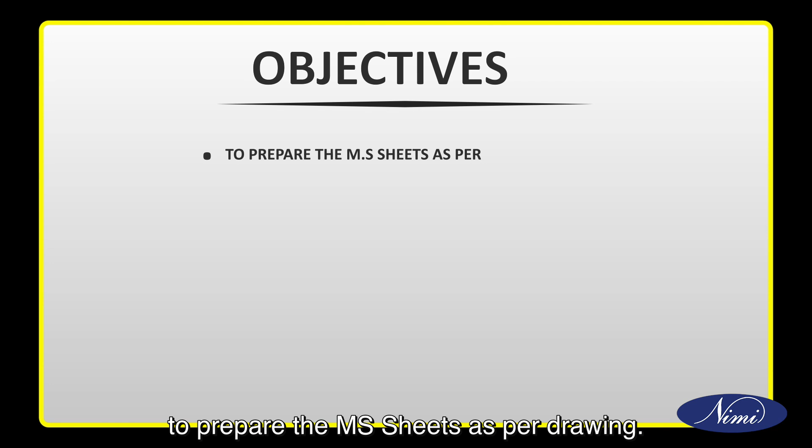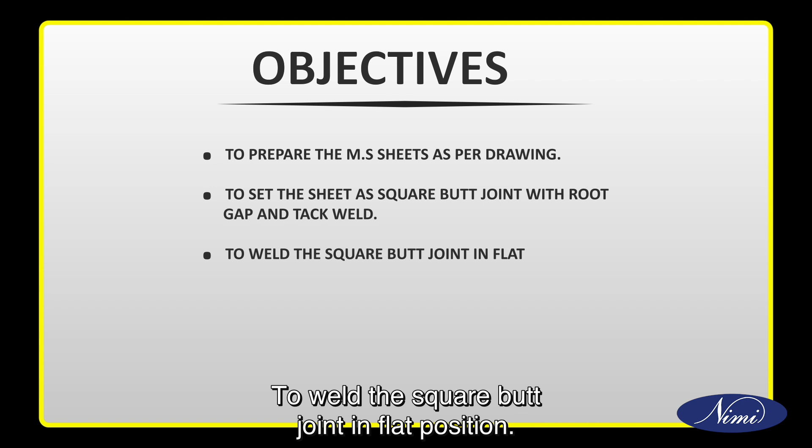Hello students. Today we have an exciting topic to cover as we dive into the art of welding and learn how to butt weld. Objectives of these videos are to prepare the MS sheet as per drawing, to set the sheet as a square butt joint with root gap and tack weld, to weld the square butt joint in flat position, to clean and inspect for surface defects. Let's start.

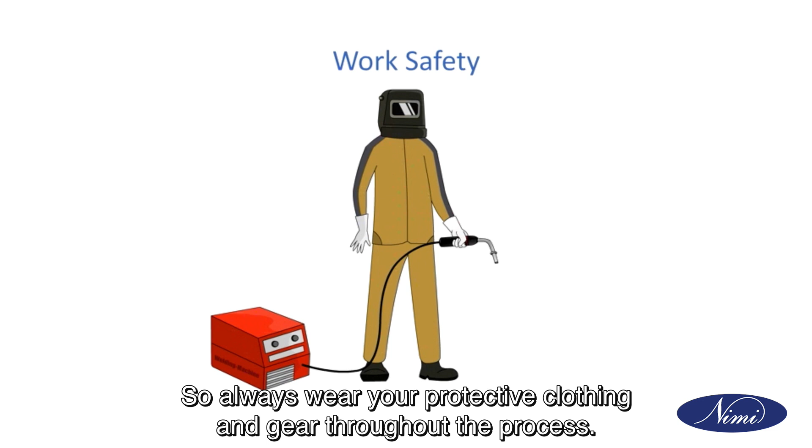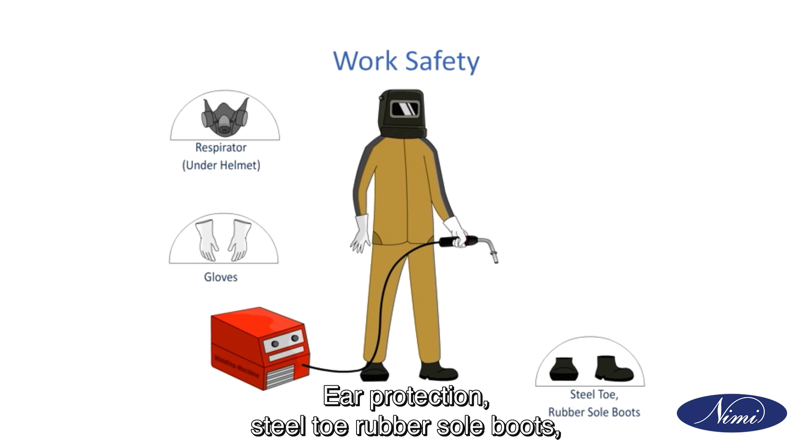Safety is our top priority. So always wear your protective clothing and gear throughout the process. Wear respirator, gloves, ear protection, steel toe rubber sole boots, fire resistant clothing,

helmet and hood. The first step in creating our butt joint is to cut the sheet according to the drawing. The dimensions of each sheet should be 150 into 50 into 3. Measure carefully and make the necessary cuts.

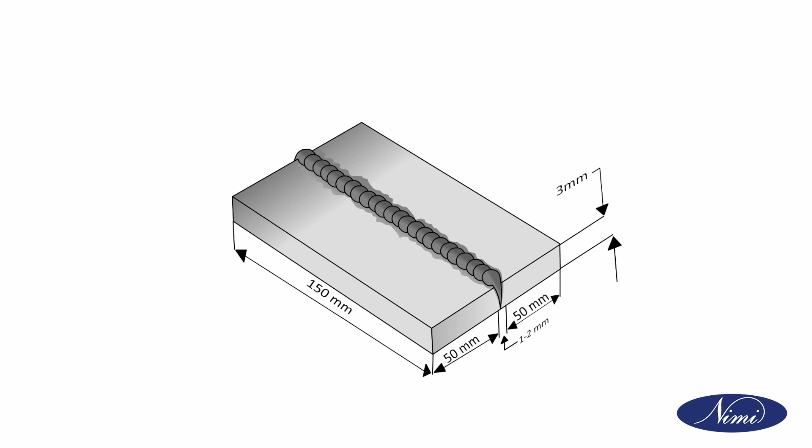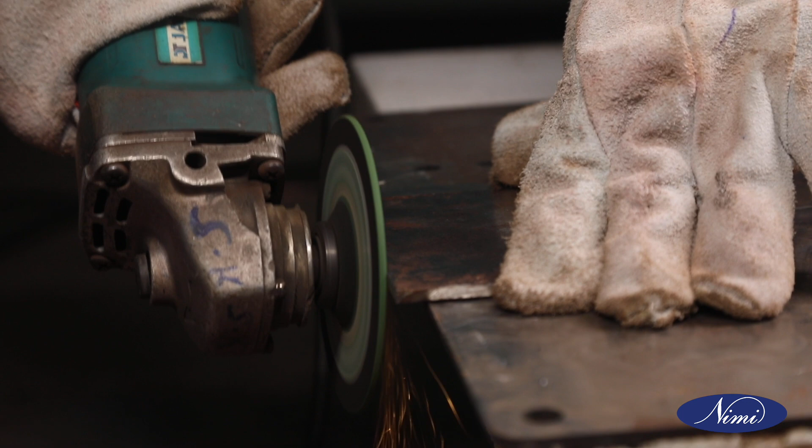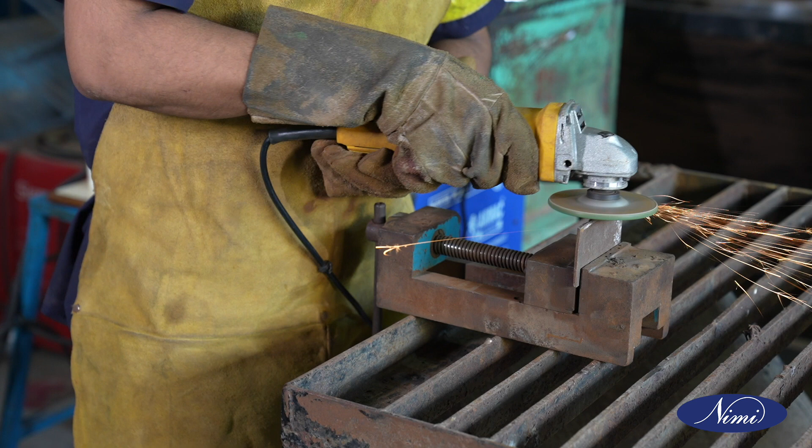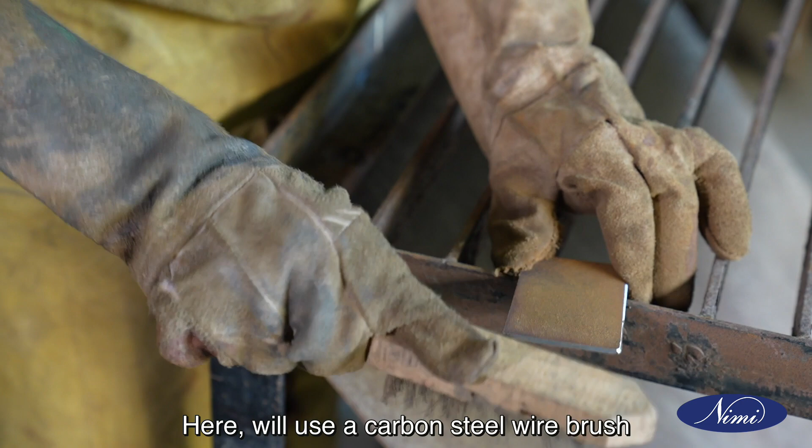After squaring the edges, it's essential to deburr and clean the surface of the plates. Here, we'll use a carbon steel wire brush and filing to remove any rough edges and impurities. A smooth surface will help us achieve better welds and ensure a stronger joint.

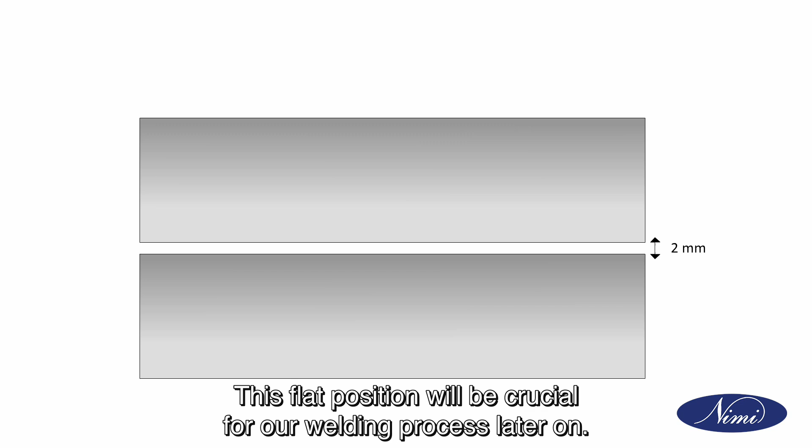Next, let's set the plates parallel to each other with a small gap of 1 to 2 mm between the plates. This flat position will be crucial for our welding process later on.

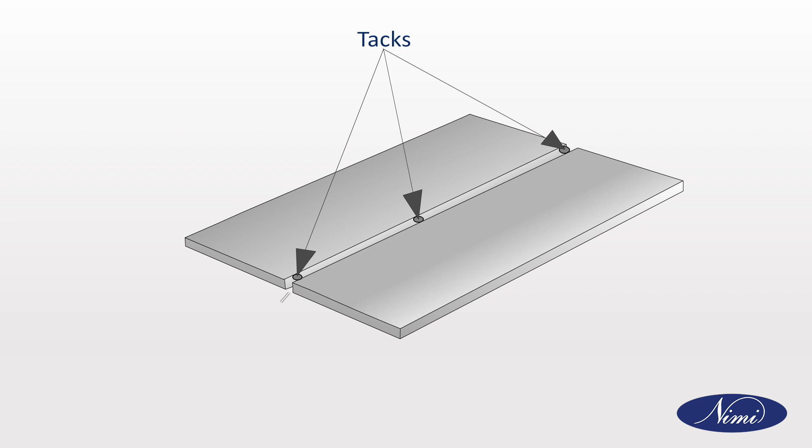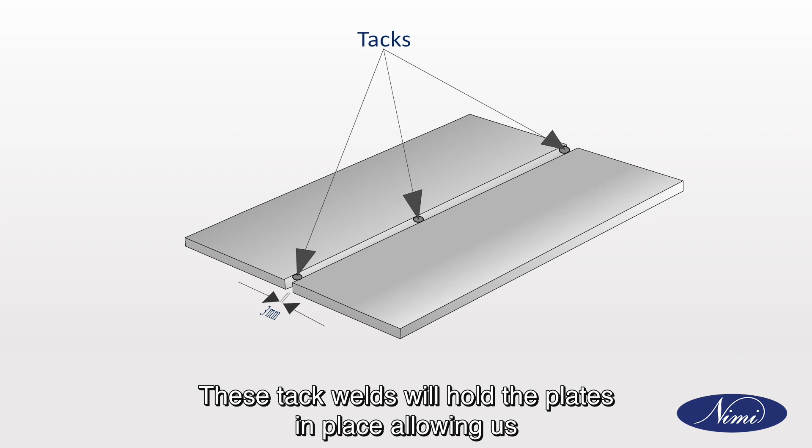Now that our setup is complete, it's time for tack welding. We'll tack weld both ends of the butt joint as shown in the figure. These tack welds will hold the plates in place, allowing us to proceed with the main welding process confidently.

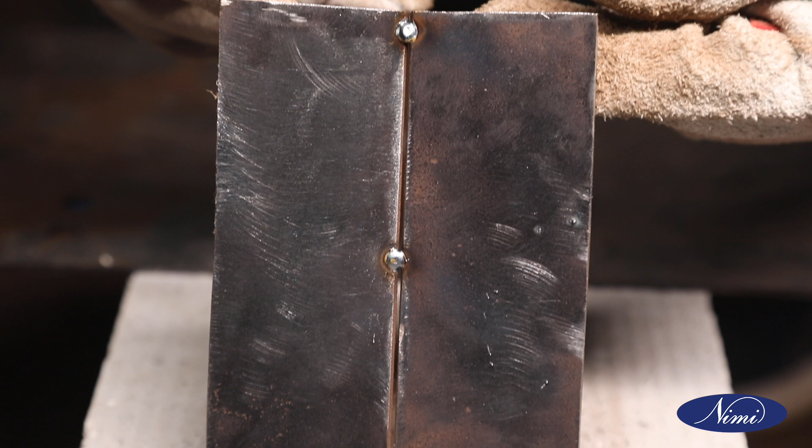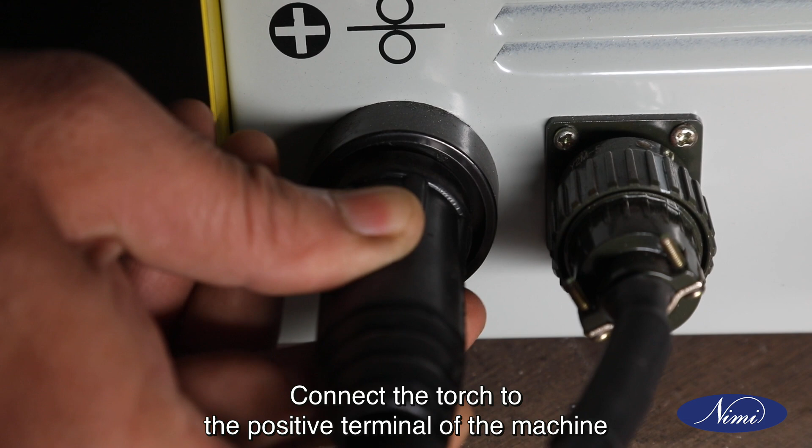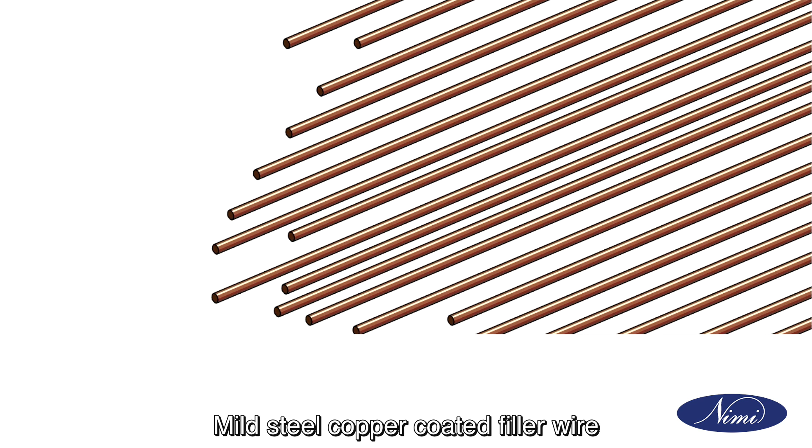Before we start the main welding, let's ensure our welding machine is set correctly. Connect the torch to the positive terminal of the machine. For the butt joint, we'll use a 0.8 mm diameter mild steel copper coated filler wire, employing the stringer bead welding technique for a clean and strong weld.

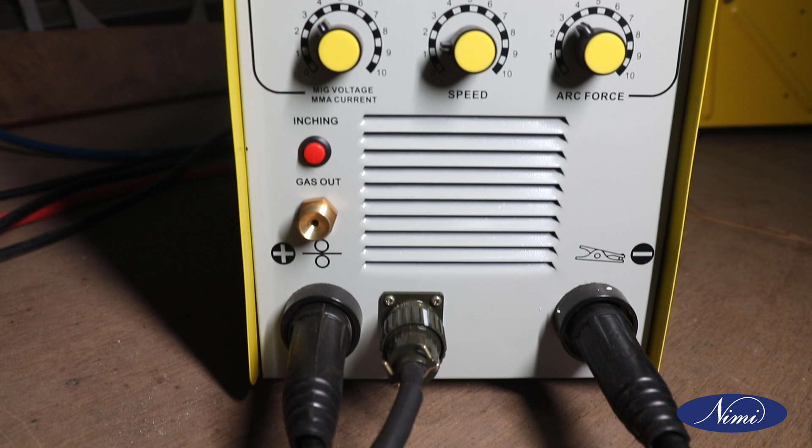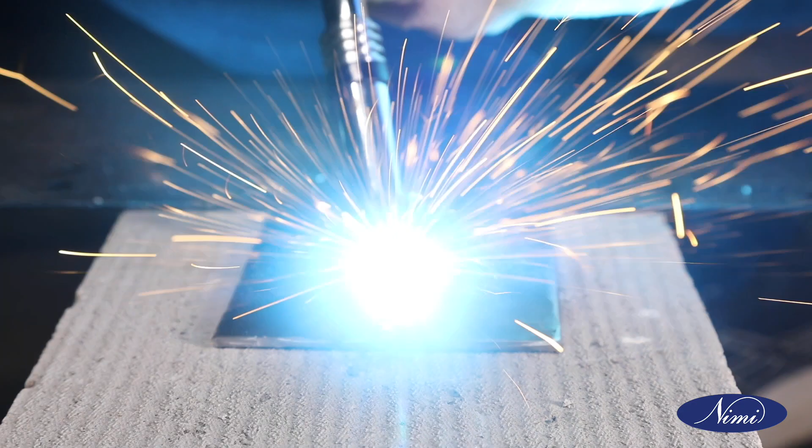Set the welding current to DCEP, direct current electrode positive, at 90 to 100 amperes with a wire feed rate of 3 to 4 meter per minute. Additionally, maintain an arc voltage of 18 to 20 volts and a gas flow of 8 to 10 liters per minute. The stick out distance should be 8 to 10 mm.

Weld the butt joint using the stringer bead technique and dip transfer mode. As you weld, focus on forming a keyhole to ensure complete penetration and even fusion of the plates.

Once the welding is complete, it's essential to clean the bead using a wire brush. This will give us a neat finish.

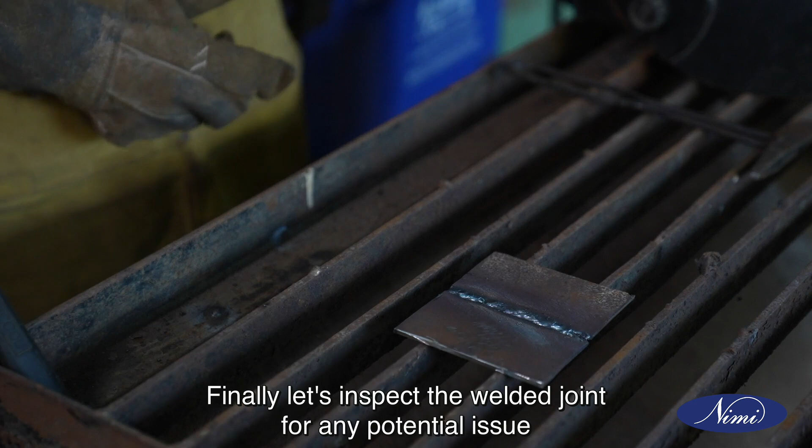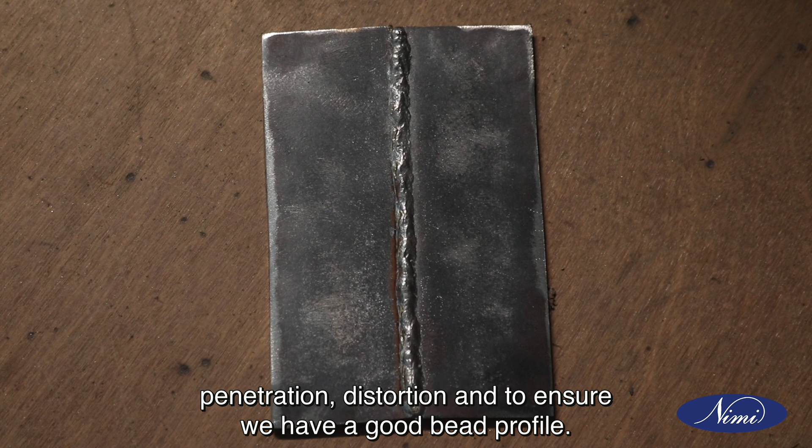Finally, let's inspect the welded joint for any potential issues such as undercut, uneven bead formation, penetration, distortion, and to ensure we have a good bead profile.

Note: use anti-spatter spray as and when the torch nozzle gets clogged with weld spatters. If this is not done, the wire feed will become irregular, causing unestablished arc, and the carbon dioxide flow will not be uniform, which will cause atmospheric contamination of the weld and porosity.

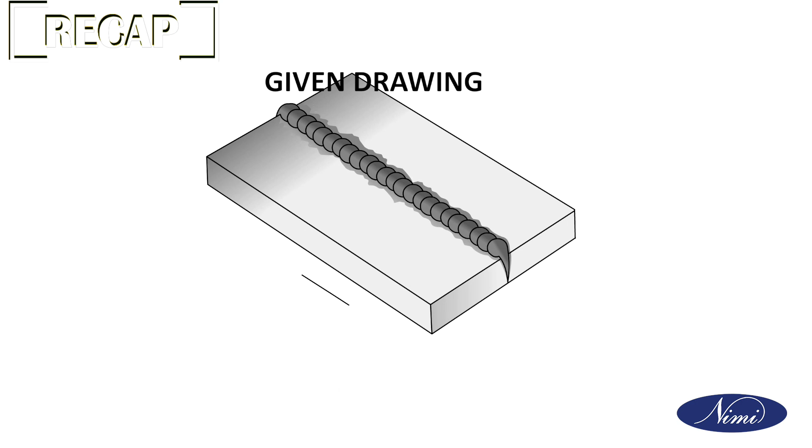Let's quickly summarize. For square butt joint, cut, grind, and file sheets, deburr and clean surfaces, tack weld ends.

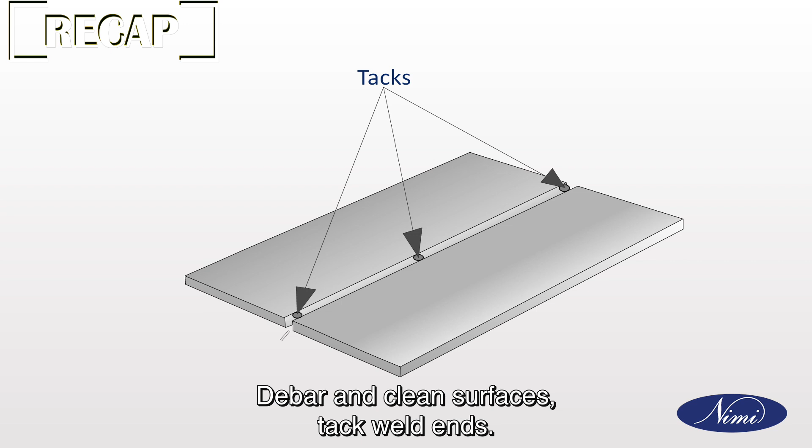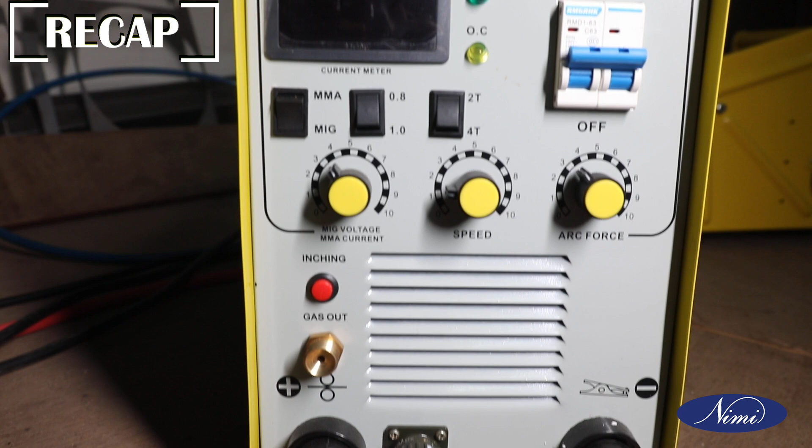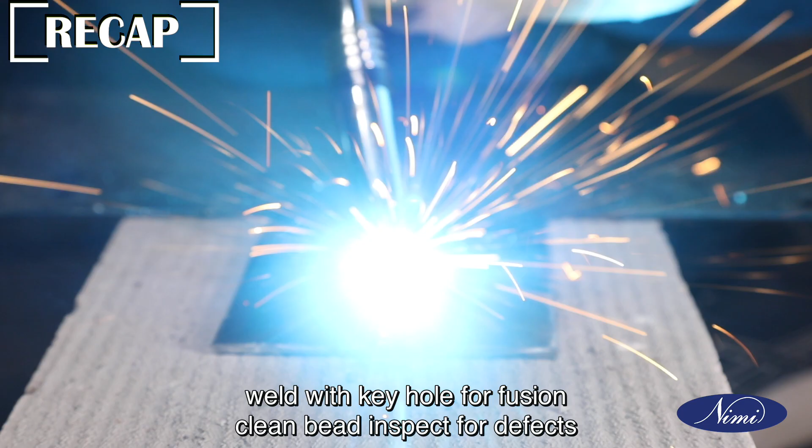Use 0.8 mm filler wire stringer bead technique. Use DCEP current of 90 to 100 ampere, 3 to 4 meter per minute wire feed rate. Set 18 to 20 volts, 8 to 10 liters per minute gas flow, 8 to 10 millimeter stick out, weld with keyhole for fusion, clean bead, inspect for defects.